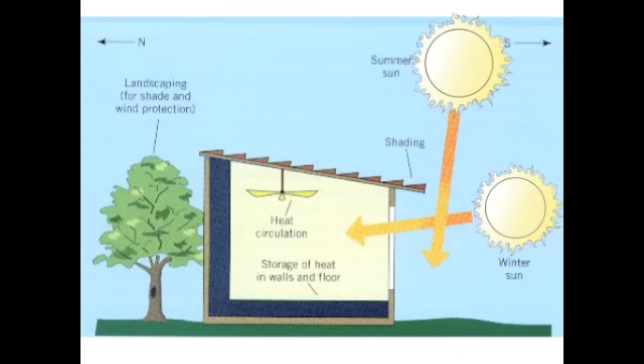Well-oriented buildings maximize daylighting through building facades, therefore reducing the need for artificial lighting. Buildings that maximize sunlight are ideal for the incorporation of passive solar collection techniques that can reduce carbon use and enhance user comfort. A careful strategy can also mitigate overheating and glare when sunlight is excessive. It is important to know how the sun interacts with buildings in high summer and the depths of winter.

Factors that affect buildings' orientation. The relative position of the sun is a major factor in heat gain in buildings, which makes accurate orientation of a building a fundamental consideration in passive solar construction. Most importantly, a building's ridgeline should run east-west to maximize the length of the southern side.

Buildings reoriented towards the sun without any additional solar features save between 10% and 20%, and some can save up to 40% on heating. Builders should note that these directions are given in reference to the sun and not magnetic north, which can vary significantly from the sun's actual position.

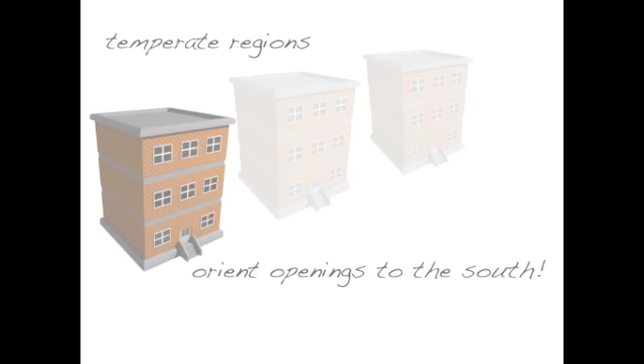Buildings in temperate regions can benefit from admitting the sun into buildings' interiors. Openings should be oriented southwards and consider the use of conservatories and buffer spaces. Office buildings focus on the reduction of excessive solar heat and glare. This is because a greater majority of offices have glazed facades and higher internal gains from people and computers. Glazing due south should be used sparingly and incorporate shading devices.

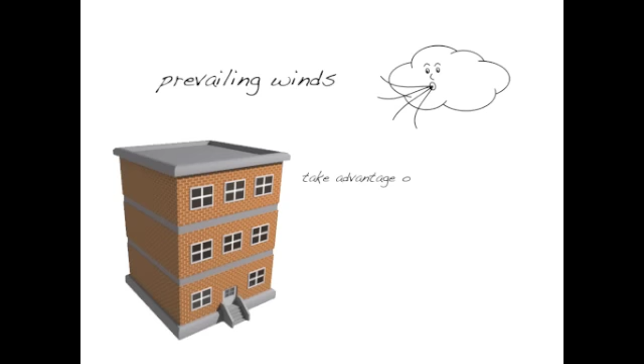Another environmental factor that should be considered in the equation of building orientation and positioning is prevailing winds. Prevailing winds are winds that blow predominantly from a single direction over a particular point. Data for these winds can be used to design a building that can take advantage of summer breezes for passive cooling. They can also shield against adverse winds that further chill the interior on an already cold winter day, or even prevent snow from piling up against windows and doors.

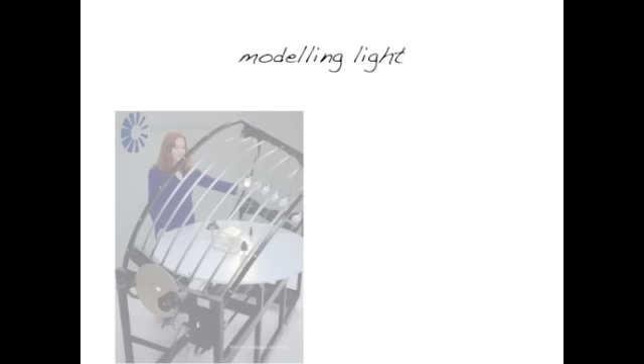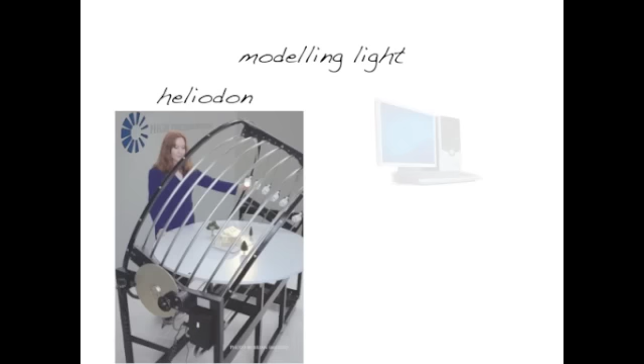Modeling light. Many older home designs were oriented through the use of a heliodon, which is a movable light source used to mimic the sun's path that hovered over a small-scale model of a proposed building. Today, mathematical computer models calculate location-specific solar gain and seasonal thermal performance with precision, and have added the ability to rotate and animate a 3D color graphic model of a proposed building in relation to the sun's path.

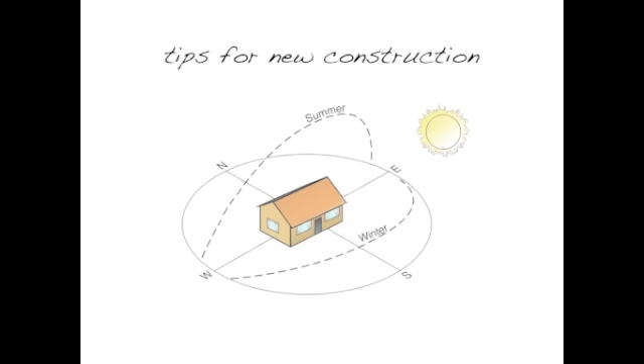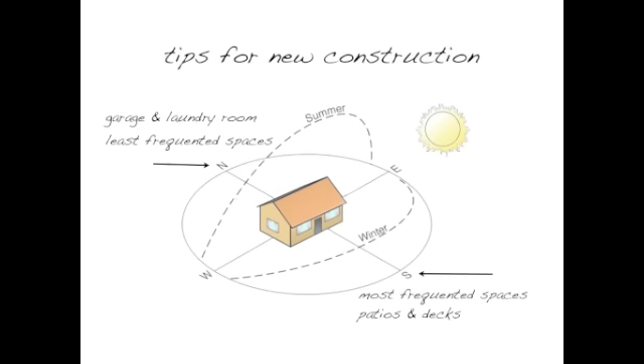Tips for new construction. Orient the floor plan with all adjacencies considered towards the sun. Design the building so that the most frequently used rooms are on the southern side. Patios and decks should be built on the south side of the building, where direct sunlight will permit their use for more hours during the day and more days during the year. In a house, the garage, laundry room, and other less frequently used rooms should be situated at the northern part, where they will act as buffers against the cold winter winds.

Plan for tree shade. Trees are an important factor in passive solar design because they can provide needed shade on a summer day. Conversely, if trees are not planned for the correct area, they can potentially starve the house of natural light when it is needed the most. Deciduous trees planted on the south side will lose their leaves in the winter and allow natural light to enter the house, while evergreen trees planted on the north side will provide shade from the summer sun. Builders should carefully consider the age, species, and growth rate of existing trees before deciding where to orient a structure on a building lot.

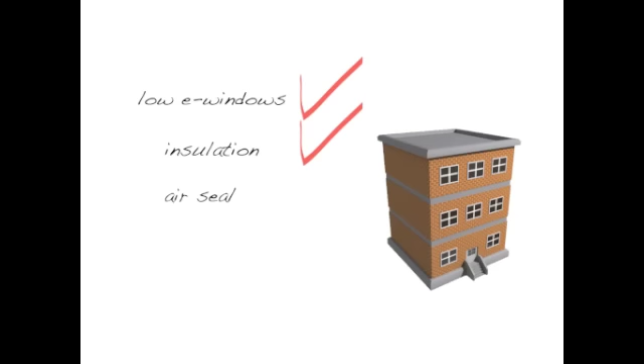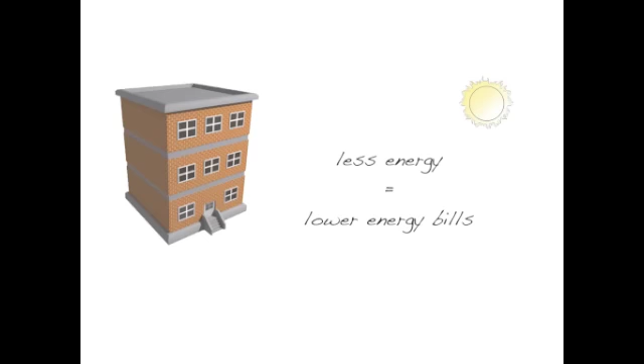Ultimately, factors such as street appeal and the property's lot dimensions may restrict a builder's ability to orient a building in strict accordance with passive solar techniques. Even while working under these constraints, however, a builder can still create an energy-efficient home through the implementation of energy-saving features such as low-E windows, adequate insulation, air sealing, and cool roofs. Overall, homes oriented to the path of the sun will require less energy for heating and cooling, which will result in lower energy bills and increased indoor comfort.